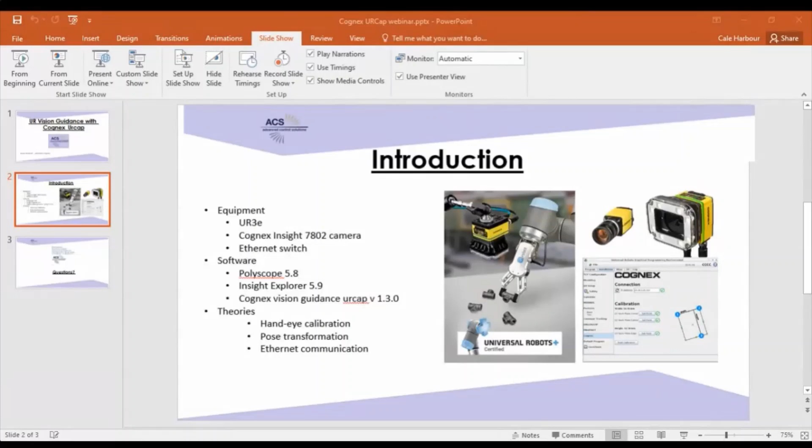So first of all, the first step is that you're going to have to install all of the software. We are going to go under the assumption that you already have In-Sight Explorer downloaded and you already have the most current robot software. To download the URCap, you could just Google Cognex URCap, and you can download the URCap software here. And also, we could download the user manual, which is essentially a step-by-step process of what we're going to be walking through today, if you guys have any questions.

Once we go over to the robot interface, what I have here is our UR3E teach pendant. I know it's a little bit delayed, but you should be able to see my cursor. To install the URCap, you'll just come over here to the hamburger menu in the upper right. You'll click on Settings, come over here to System, go into URCaps, and hit the plus button.

You would need to insert a USB disk into the controller or into the USB hub in the upper right hand corner of the teach pendant. Select the URCap file there and then restart the robot, and you should see an indication like this that shows the URCap name, the developer, and now we have this driver installed on the robot software.

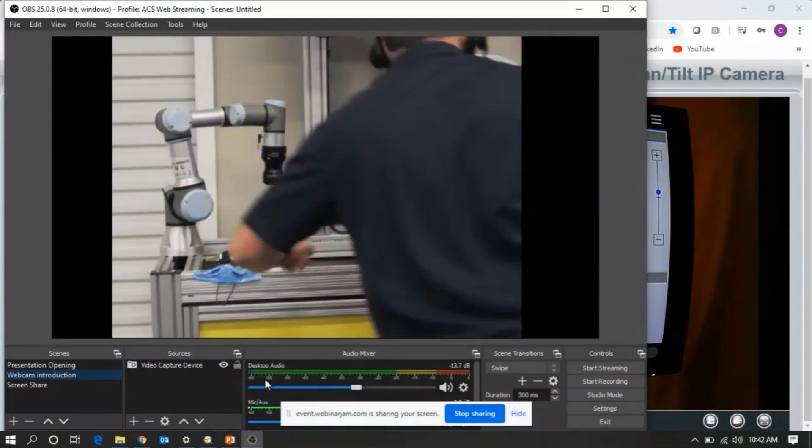One prerequisite is that you have a correctly defined tool center point. So if I come over here to my installation tab, you can see the TCP is defined here. That is just a direct Z offset from the gripper. To just show you the setup that we're working with here, this is a live image of our robot. I have a free drive switch in right here. And so the tool center point is just the direct tip of where you're making contact with your part. So in this case, it's just the tip of our fingertips.

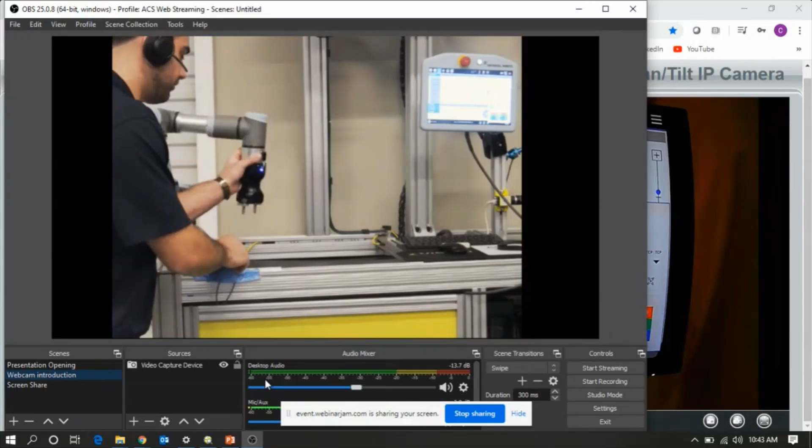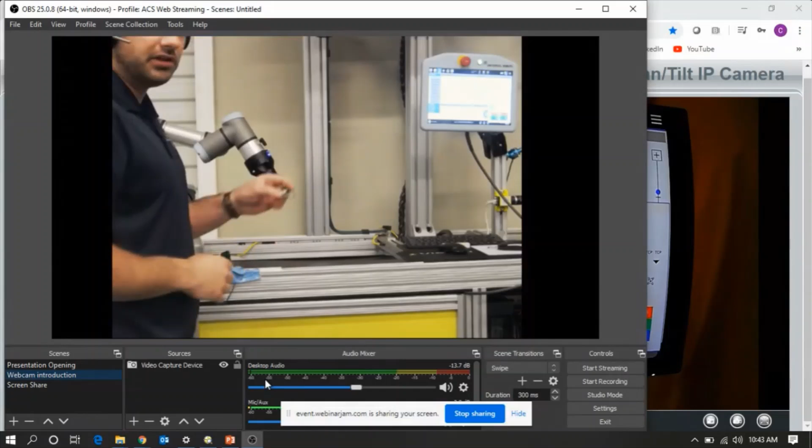I have this free drive switch that is tied to the robot controller so that when the switch is on, I can move the robot, and when it is off, I can lock it in place. So what we're first going to need to do is hold our part in the gripper so that we can detect our TCP. So I will come over here to my robot interface, and I will turn my free drive off. And first I just need to activate the gripper because we just powered on. So I'll hit the button to activate.

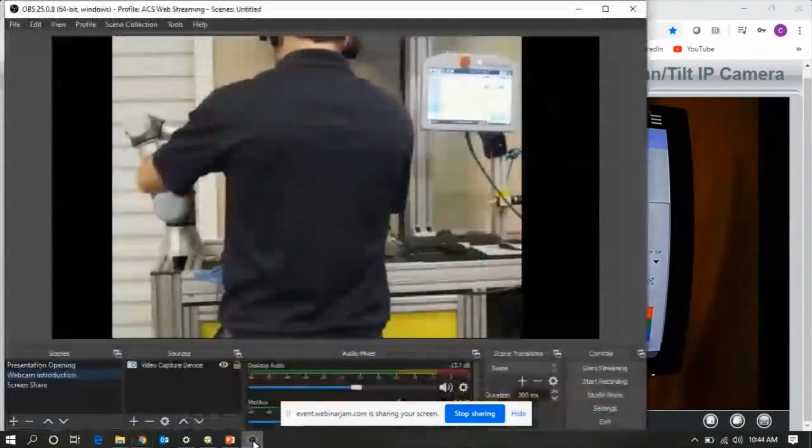I want to slow down the speed, and I'm just going to hold this part in the gripper, and we have it in the gripper now. So I will turn on my free drive again and position my robot in the field of view. So we're about flush with the field of view right now. If you can see, we're about a fist height below where this 8020 is on our setup.

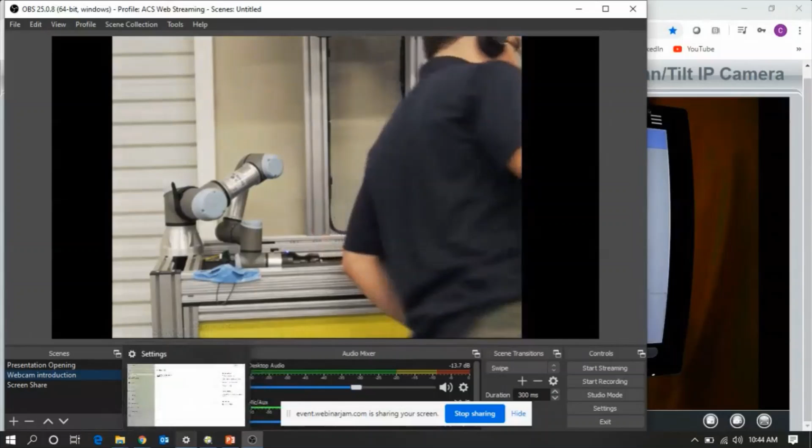So I'll turn off my free drive, and now that we have the part in the field of view, we can come back over here to In-Sight Explorer and configure our vision guidance. So if I trigger the camera, I should see the part there. So now we need to add a location tool. So just working down the Easy Builder menus, I'm going to look for a pattern.

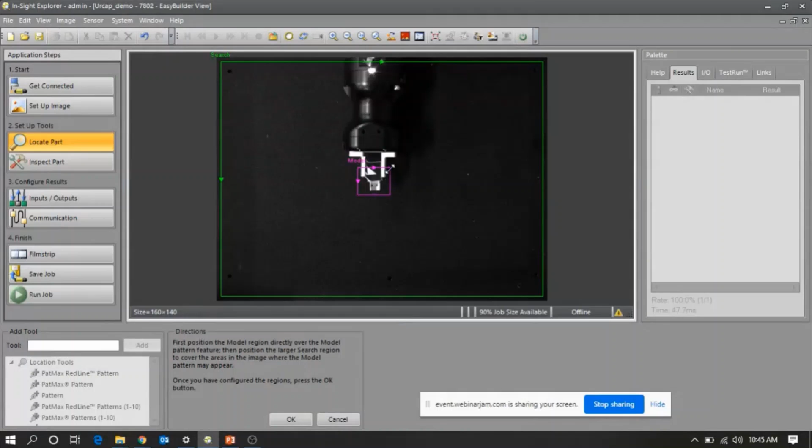So I'm just going to click Pattern and add a pattern. Our search region, we want to be the whole field of view, so we're going to leave that the same. And I am just going to align the model with the pattern in our field of view. So if I hit OK, I can see that the pattern is now found.

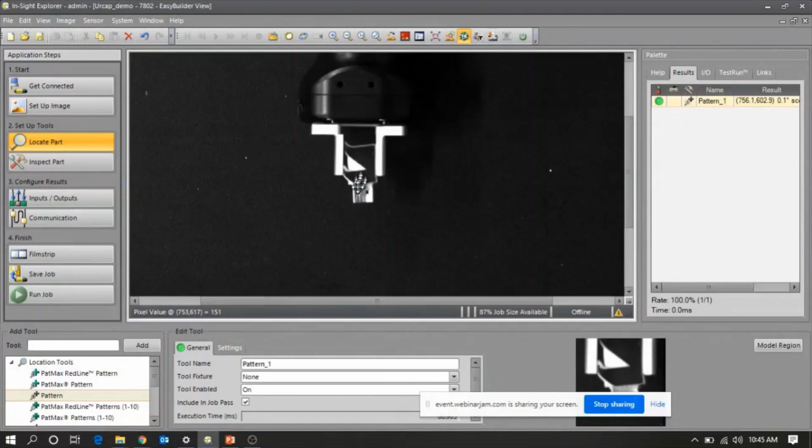So one quick note is that it is extremely important that the location of the pattern tool is directly where your tool center point is defined in your robot interface. So you can see here it's a few centimeters, probably not centimeters, pixels would be the better term. It's a few pixels below the tip of the tool.

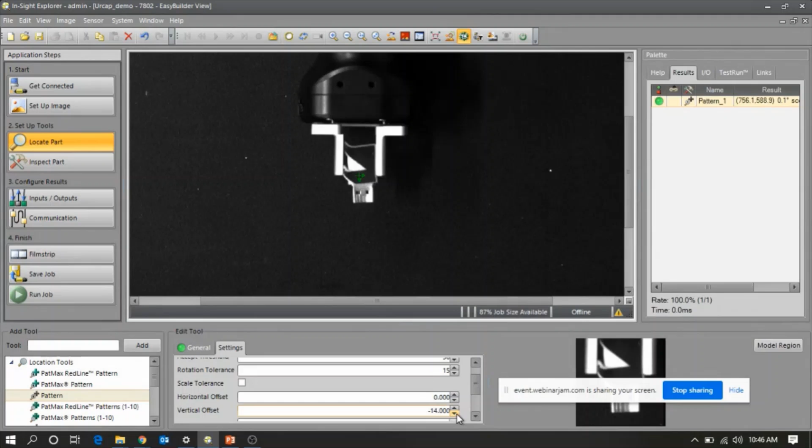So I can come down here to the settings of my pattern tool, and if I click on the vertical offset, that is going down. We just want to move it up roughly to be directly where our tool center point is. That looks about good. So now we have found our tool center point.

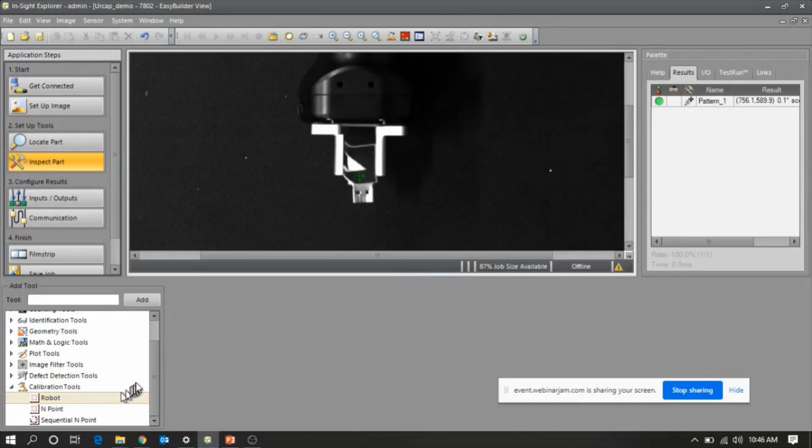We need to now link this inspection tool to a robot guidance tool. So I'll click on inspect part. I can come down here to calibration tools and click robot. After I double click this calibration tool, you can see in the directions I need to select a smart feature.

That smart feature is just going to be my pattern. So I'm just going to click on that pattern there. If I zoom in a little bit, that will be a little bit easier. So I click on that pattern, and now our calibration tool is linked to our pattern tool. So we are configured for our calibration job here on the camera. So now I'll save this as calib_webinar.

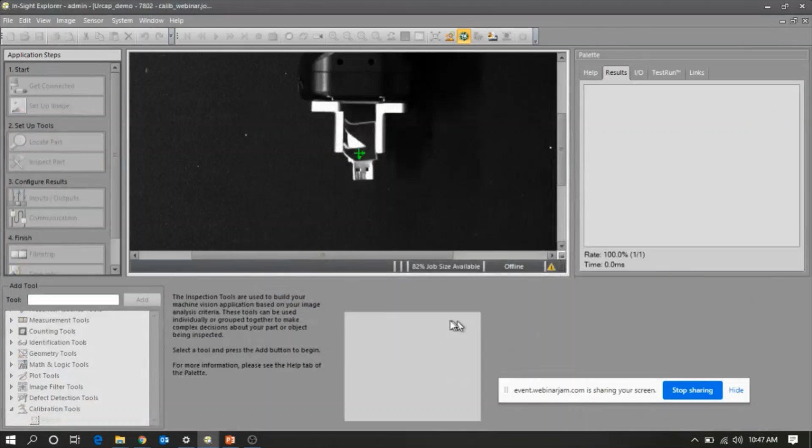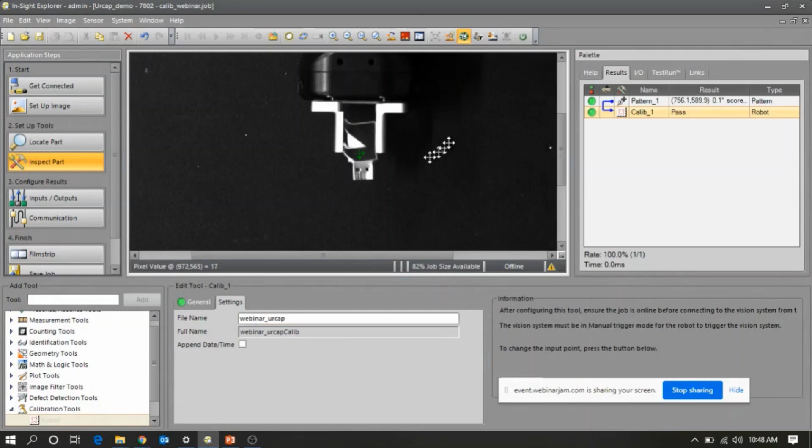Coming back in here to our calibration tool, you can see the name of the calibration file that is going to be generated. This is that file that you will reference to translate the 2D pixel coordinates to the 6-dimensional robot coordinates. So I'll just call this webinar_URCap, and then we can append the date and time if we wanted to. We don't really need to do that here, so it would just be named webinar URCap calibration. Okay, so we are set up on our camera to find our tool center point.

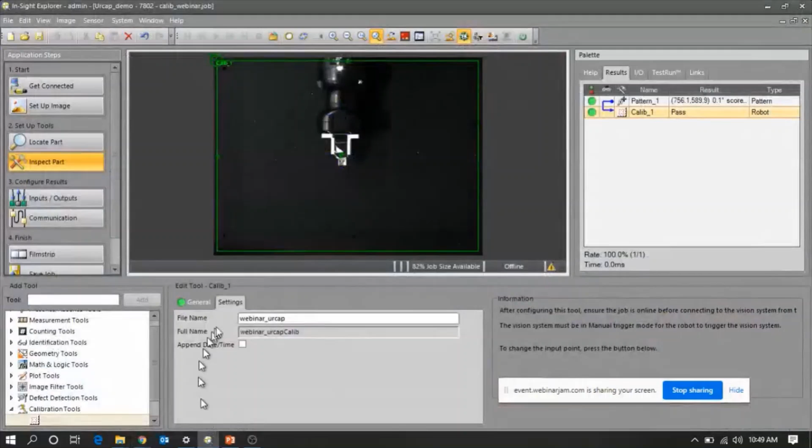So I can click on set point, and I will jog the robot relative to the base, and I'm going to go to this front left corner of my field of view. So to ensure I can find the pattern at that point, I could come over here to the camera interface and select it on repeating trigger, and we're about close to the edge of the field of view there. So I can come over here to the robot interface again and select OK.

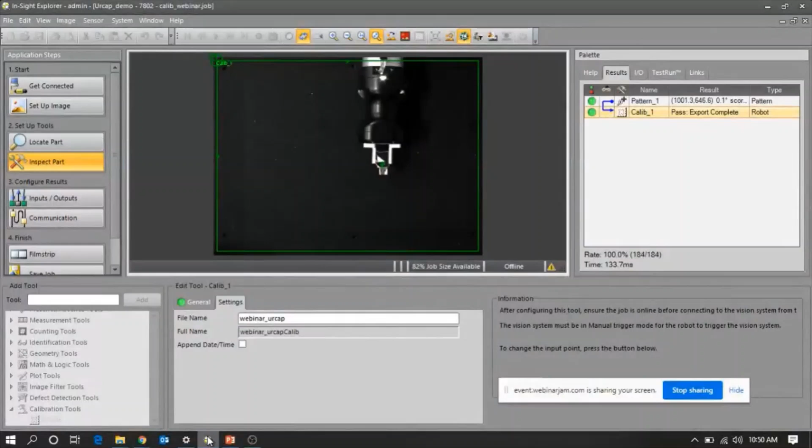Now we need to set our second point. So I can jog the robot forward in my X plus. Again, coming back over here to the In-Sight interface to ensure we are finding the pattern. We can see it there. So I will then go back to my robot interface and confirm that point. And finally, we need to teach the height. So if I come back here to the camera, that's about at the edge of our field of view there. So coming back to the robot interface, once you see that all those 3 points have been set, you'll get a green check mark by each of the 3 points.

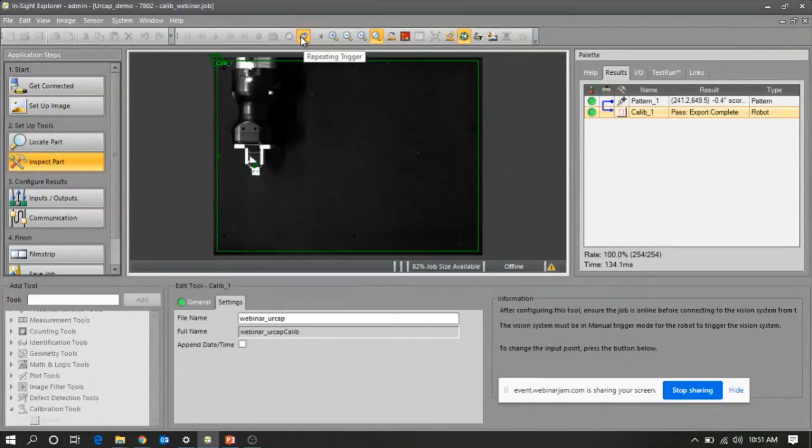So now we just need to ensure that the camera is online. So I will take it out of repeating trigger mode, put the camera online. Again, remember the step earlier of configuring the image trigger mode to manual. If it is not in manual, you will not generate the calibration file.

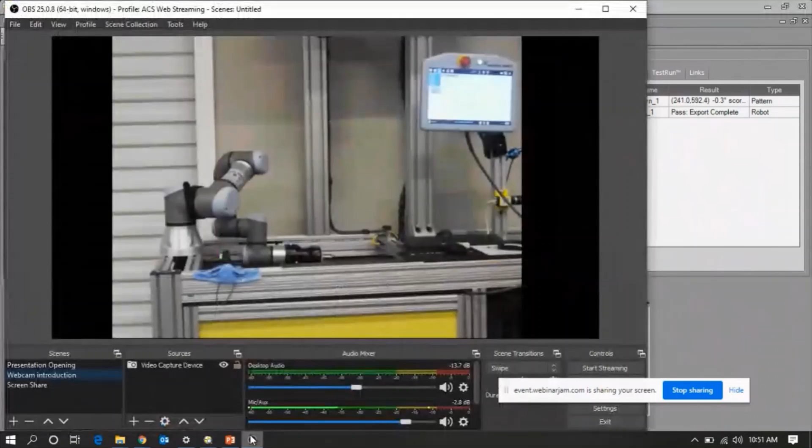But as I come over here to my robot interface, now that our camera is online, I can click on Start Calibration. And coming over here to the camera, you can see the robot is moving to these positions in the field of view and automatically generating the calibration file. So just to get a quick image of what that looks like, I believe there's 25 different positions that the robot is generating based off the field of view coordinates that you would set.

So it just finished, and if we come back over here to the robot interface, we will see that calibration has now finished. So I can just hit stop program, and now we have that generated calibration file. So step 1 is done. Now it is step 2, to generate our robot guidance file and program.

So I can take the camera offline. We'll save our calibration job, and we'll just open up a new job and clear all data from the current job. And we'll save this job as guidance_webinar. Oops.

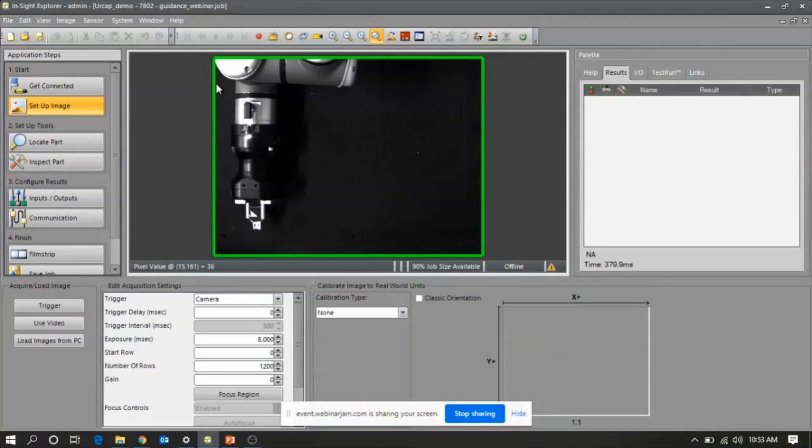So we'll do the same process here of setting up our image. So I can come in here to our live view. In this example, we're just going to be picking and placing a block. So I have that block in the field of view. Looks like we'll need to bump our exposure up a little bit to get a clear view of that block. That looks about good. Again, change the trigger mode to manual.

And then in this setup image calibration type box, we can then select import calibration. You see some of the other calibration options that Cognex has available here, but we're going to just import a calibration. We can come down here to our file name, and as we scroll down, we see a few of the other calibrations that were generated, but we have the one webinar URCap.cxt. The robot's units are in millimeters, so we do not need to change that box.

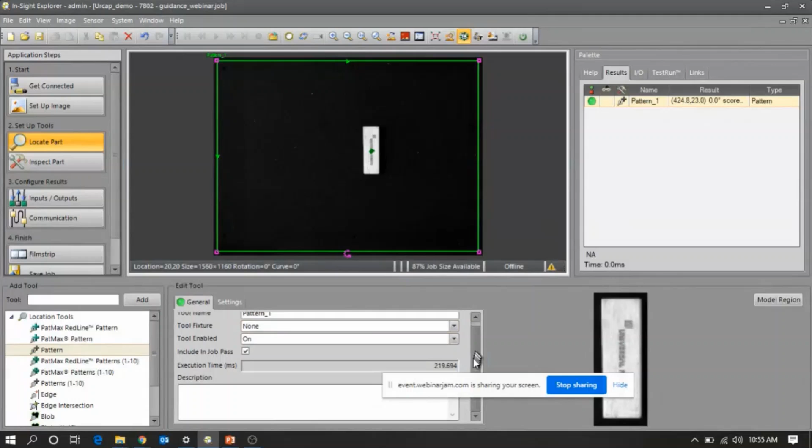So now I can just go into our locate part tool. We will set up a pattern tool again, just looking at this block. And then hit OK. One thing I will change in the settings of our pattern tool: you see the rotation tolerance here is 15. We want to pick it up if it's anywhere plus or minus 180 degrees rotated. So I'm going to change that real quickly.

So coming down to inspect part, we can go into Calibration tools and add in a robot guidance tool. Our robot guidance tool, again, is going to be linked to our pattern. If you're having issues selecting it, you can just zoom in. You see some of the other circles we can find here, because this plastic bottom of the table has holes drilled into it, and the camera is seeing through those holes and finding circles, and that's technically a smart feature, but just be aware that you want to link it to your pattern.

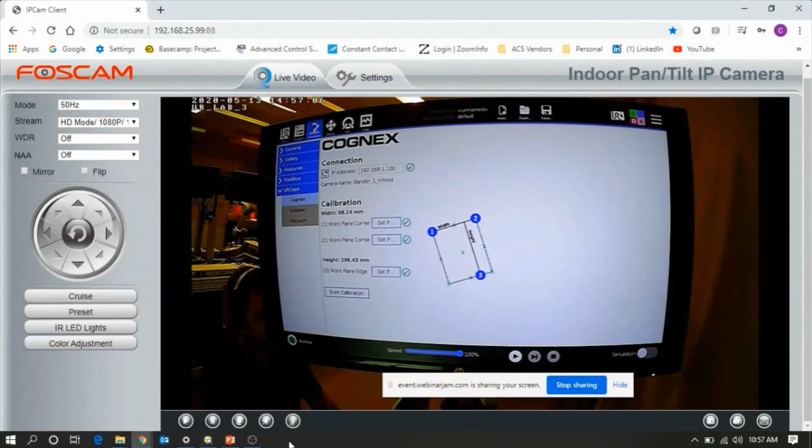So we have our pattern and our robot guidance configured. So now our camera job is good to deploy. So I will go online, and now our camera is ready to communicate and send coordinates to the robot. So we need to program the robot now. So coming back to the robot interface, we will go into program, and we're just looking at an empty program right now.

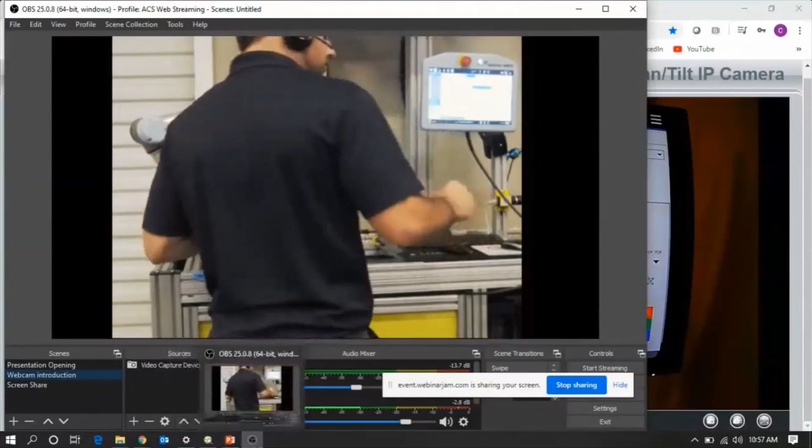So I just want to move initially to a waypoint. So I'll free drive the robot and set up a waypoint. Face it forward right there, and undo the free drive. Sorry if you guys couldn't see that. We will set that waypoint right there, and this is where we will come to trigger the camera. Right now we've got a part in our gripper. Maybe we want to make sure that the gripper is open. At this point, I'll just add in a gripper, edit action, open with maximum speed.

From this point, we then want to go in here to our URCaps, and we want to add in a Cognex camera pose. So first of all, we need to set our reference position. This reference position is the position at which the pattern was initially taught. So we taught our pattern right there, and we haven't moved this block in the field of view. So what I'm going to do is set this reference position directly above our block.

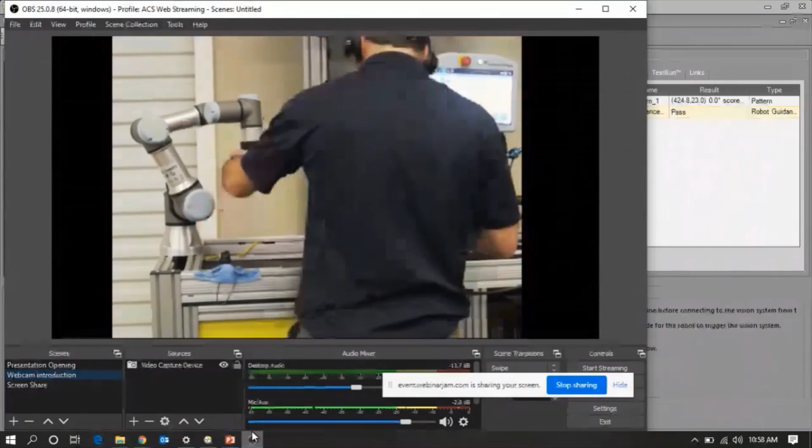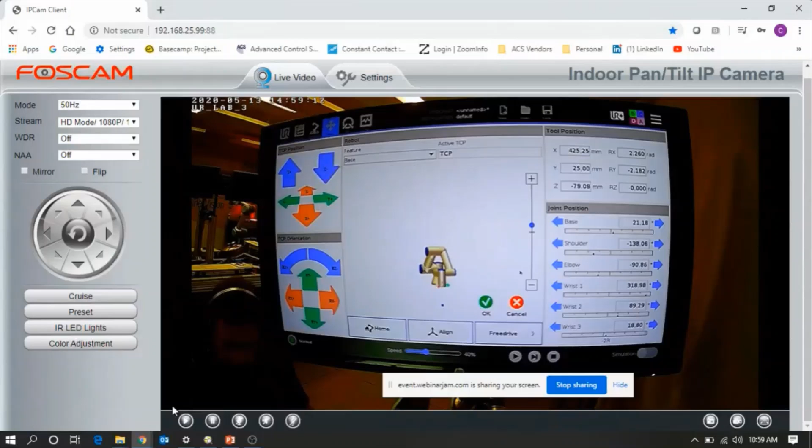Using the Align tool on the robot interface, I can turn off my free drive, align to ensure I'm perpendicular. Looks like I need to rotate wrist 3 just a little bit and make sure I'm centered on the part, but that looks good. Make sure the Z height is about there and hit OK. So you see we automatically generate this movement to where our position is.

So we probably want to move to an approach position before this, so I can add in a variable to call it approach. We'll call this APP, and this is going to equal pose add, and we're just going to add 5 centimeters to the Cognex result position. So I'm just going to select the Cognex result, and then I'll put in a blank pose here with just 5 centimeters. So 0 in the X, 0 in the Y, 0.05, and 0 in the RX, RY, and RZ.

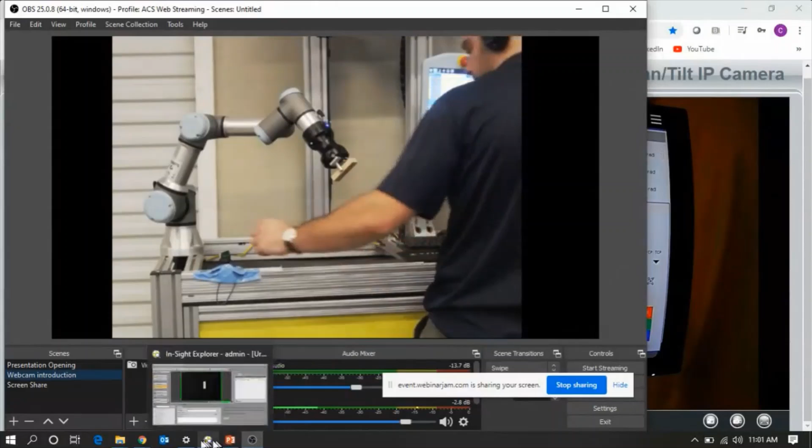So then finally, we just need another waypoint, and I will select variable position and move to the approach. So now we have an approach and a result position. Here we probably want to close the gripper. And I can hit a close command, save action. We then could move back up to our approach, so we just go straight up after we pick up the part. And then finally, we'll have it drop off the part somewhere over here to me, and just set our waypoint 2 right here. And then we can copy our gripper open command and put it there.

So now this is what happens when the job passes. When the job fails, I'll just add in a pop-up that says fail. And when there's no response, we'll say no response. Okay, so we can make this a joint move just so it's a little smoother motion. We can save the robot program as webinar.

And we should be good to run our program. So I will open up my gripper and put the part in the field of view. We will again ensure that the camera is online. Camera is online. And now we can go to run the program.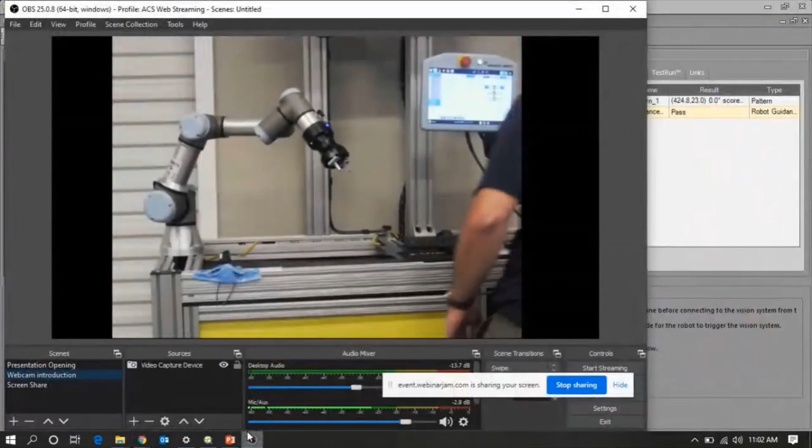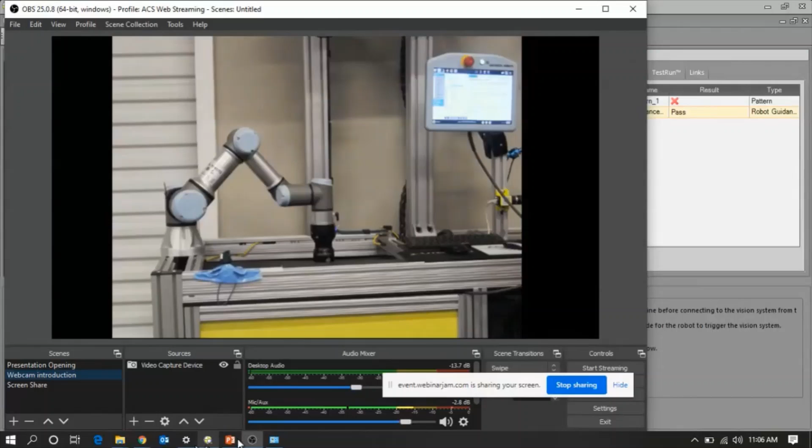There we go. So what we need to add into our robot program, if we come back over here to the robot interface, is a wait command, because the camera is being triggered before I had time to put the part back. So I'll add in a wait for, we'll say 3 seconds. So if I play the robot program and come back over here so you guys can see it.

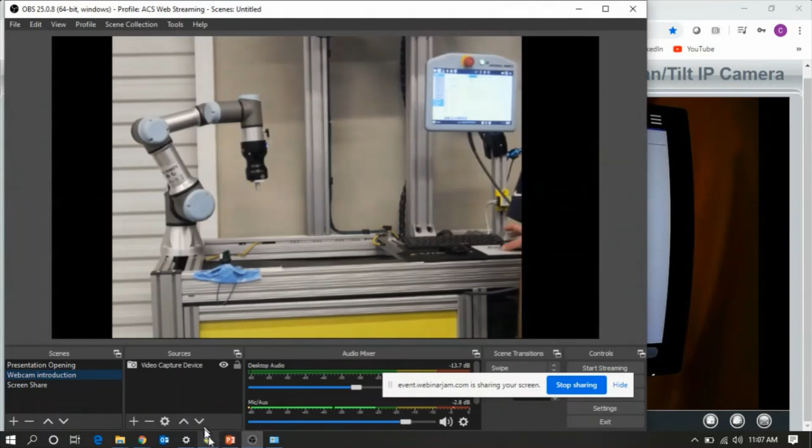The robot then goes, picks the part from there, and it hands off. So you can put the part back down here again, run the program, and once we go in to see our camera interface here in just a second, we can see the coordinates that it was found at. So if I come back over here to the camera interface, you can see our coordinates and our angle that we were found at there.

If I come back over here to the robot interface, we can see in our variables where our approach position is. So these are the coordinates that are being sent over via the calibration tool that is happening there. So again, I apologize for the quick disconnect in getting the final showcase up and running. But this was just a very quick demo to show a really basic robot program that you can see here in 19 lines to approach a position and go and pick the part from there.